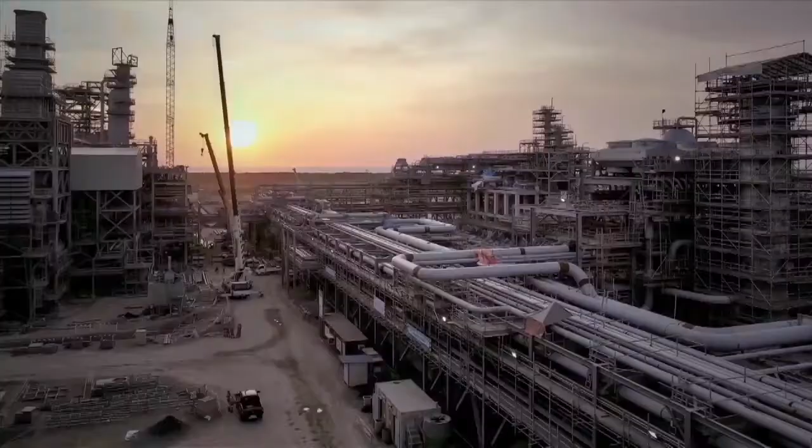A more convenient and advanced world than you can dream. A much more satisfactory solution than customers want. A company that always takes the road of success with customers. We are Haegang Alloy Company Limited.

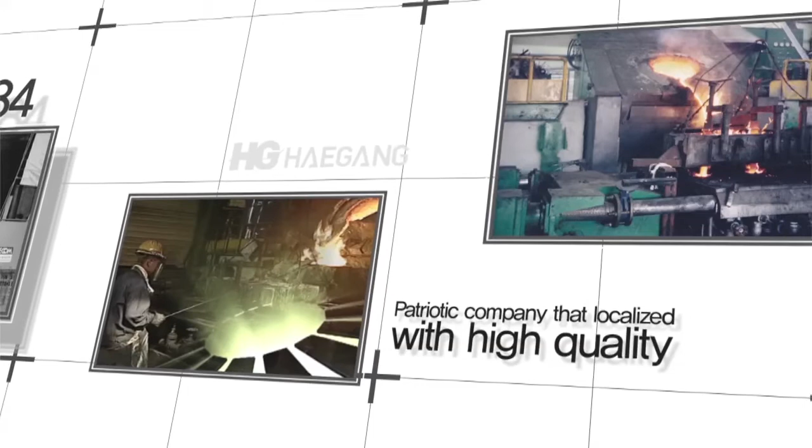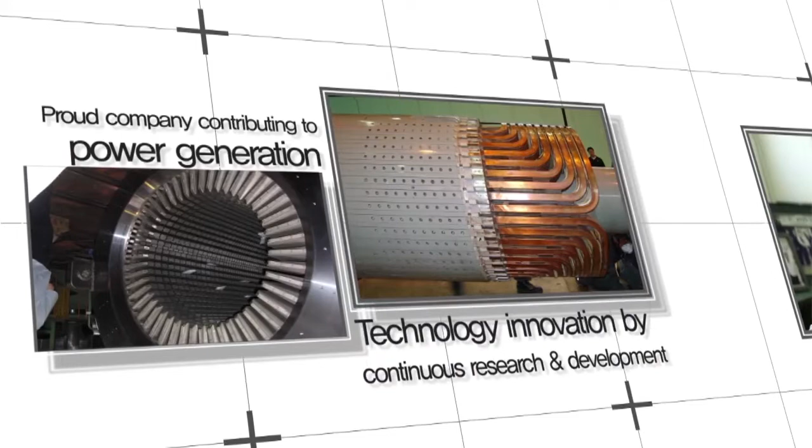Since its establishment in July 1984, we have succeeded in local manufacturing of high-quality special copper alloy that is used on import products. A patriotic company exporting all over the world, receiving attention internationally as well as domestically with huge growth. A proud company that contributes to electric power development with generator core components, fulfilling technology innovation through continuous research and development. In order to lead sustainable future growth, we are a company that moves forward to the world with new ideas, positive will, and strong drive. We are Haegang Alloy.

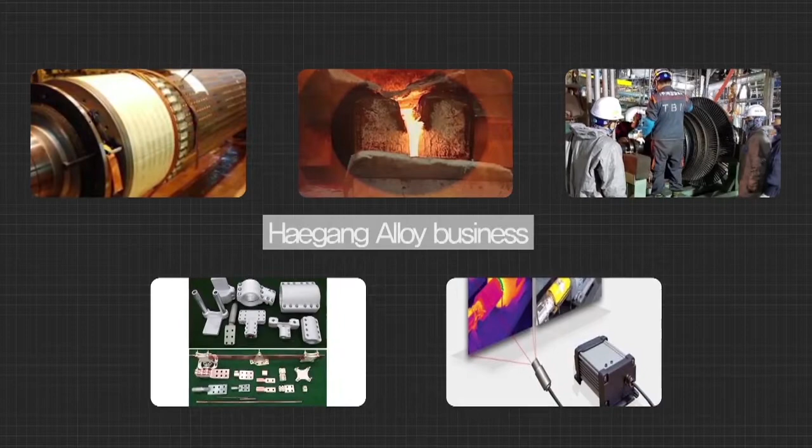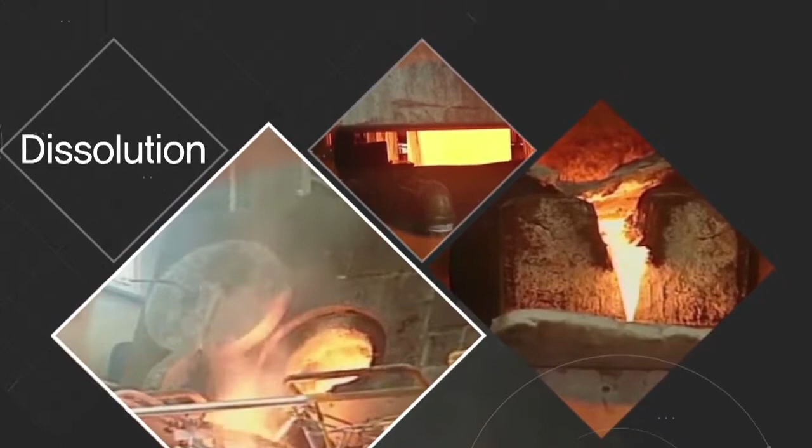Haegang Alloy has 5 key core business areas. A basic material business to produce and process copper and special copper alloy. Copper alloy material from Haegang Alloy is made by melting process, extrusion and drawing process that produce rod material, and a rolling process that produces board material. Post-processing is conducted in accordance with customer requirements using material produced by forging.

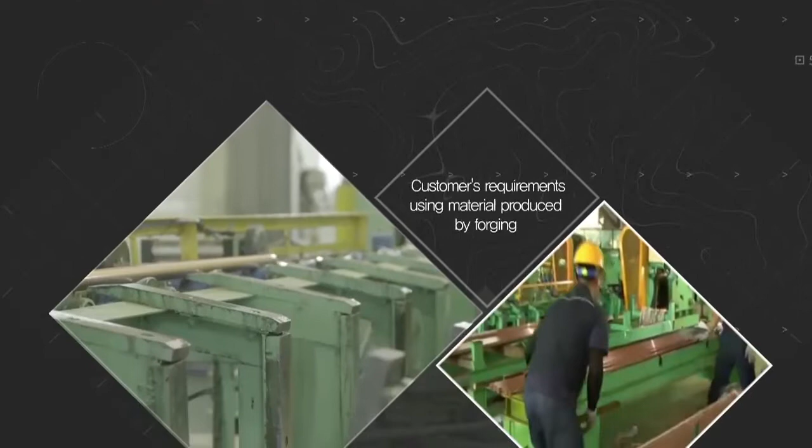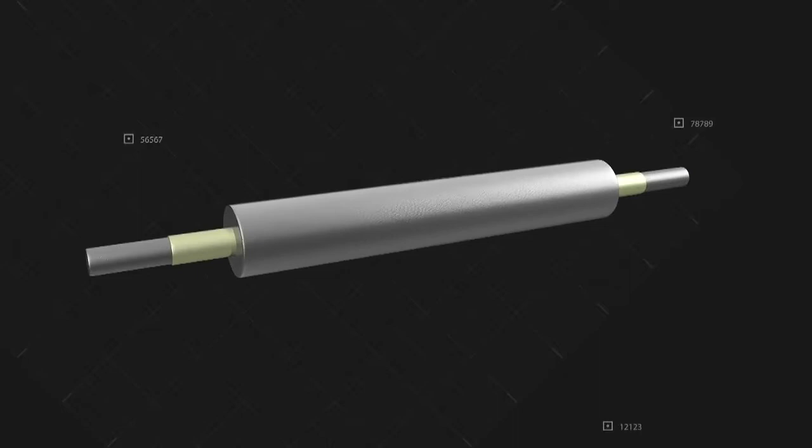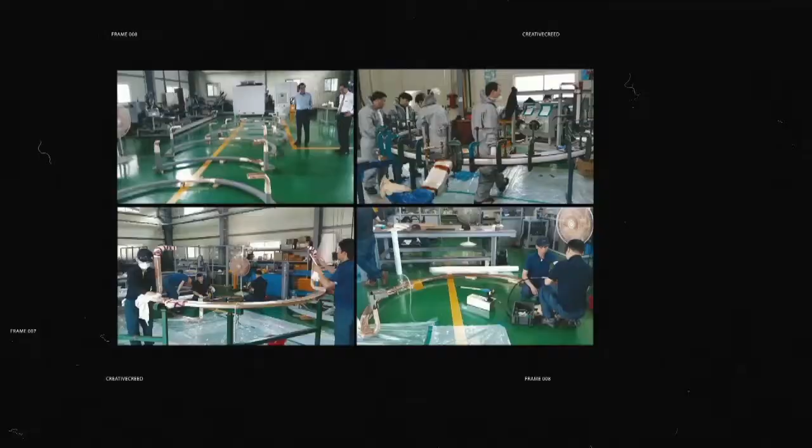A generating business that manufactures and supplies generator core components. Haegang Alloy succeeds in local manufacturing of generator stator and rotor, important core components for generators, and exports to overseas as well as local markets so that we are credited for our technology. In addition, we own top-class technology regarding special material production, bending, welding, and insulation, and we are developing fusion generator core components and accelerators which are cutting edge.

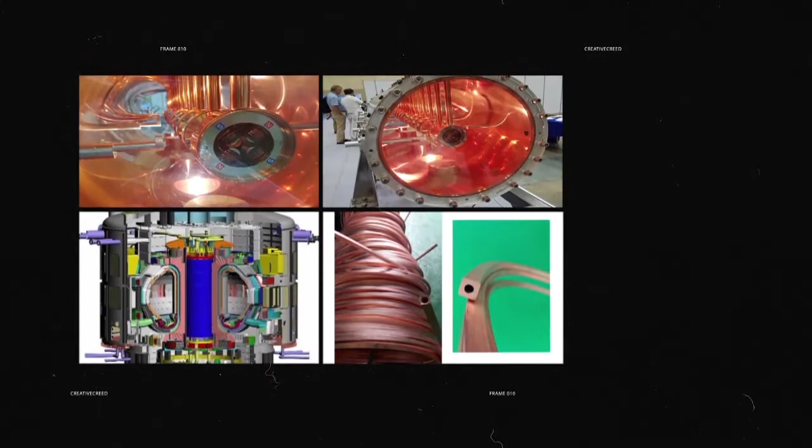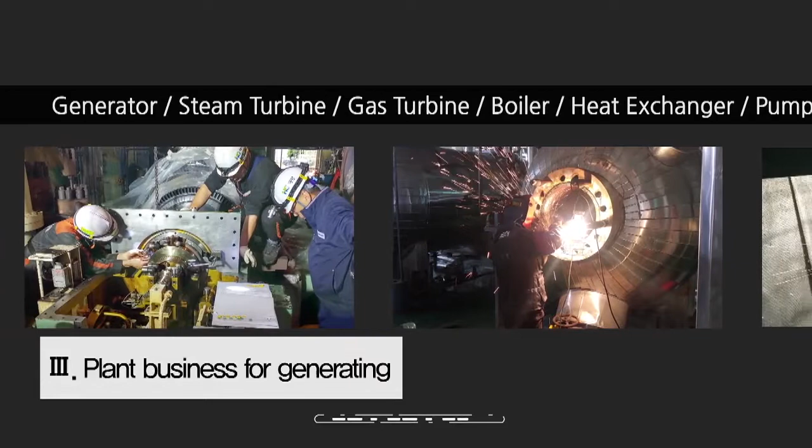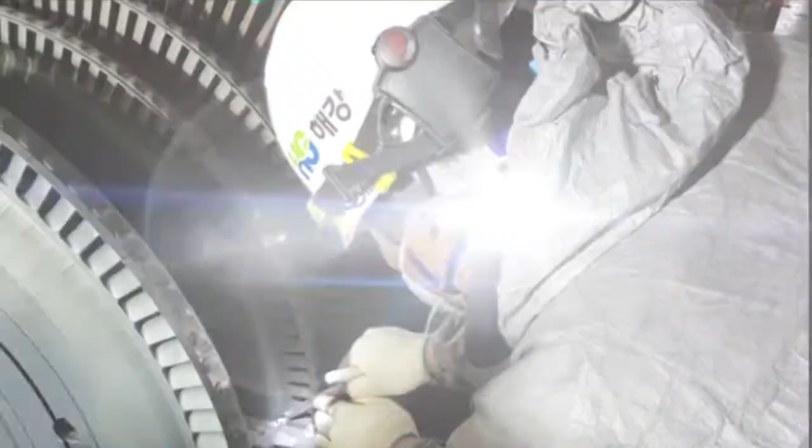Regarding plant business for generating and maintenance of industrial facilities, Haegang Alloy has experience and technology for generators, turbines, boilers, and generating facilities. There is also a power transmission and distribution components business that produces and sells materials for public enterprises, a parts distribution business, and an instrument and control engineering business that builds fire and steam pipe leakage detection systems with thermal image cameras.

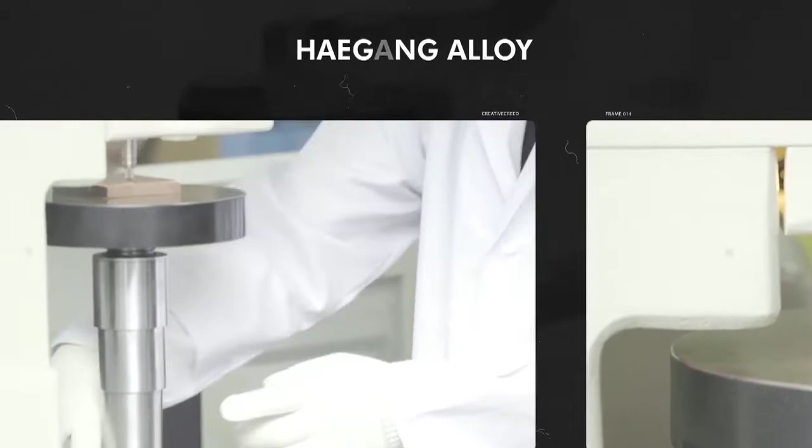Haegang Alloy has not stopped challenge and innovation for technology improvement in order to produce and develop better products. Haegang owns many patents and is registered with 6 major generating companies and KPS subcontractors of KEPCO, based on ISO quality environment certification, and has been increasing its business territory, such as executing overseas maintenance business agreements.

Haegang Alloy supplies to big companies, small and medium companies, and local 500 agents in Korea, as well as local generating companies, and supplies to 30 countries, such as the United States, Middle East, Europe, and Asia.

Haegang Alloy will stand tall in the world of generation components and total solutions based on special copper alloy material and cutting-edge technology. Haegang AP, incorporated of the world, will work hard to be with our customers and to produce a better life through new technological skills in the field of generating, special alloy, and state-of-the-art material in the 21st century.

A strong company of generating facilities that supplies power plant core components based on high-quality technology in the field of basic materials, with challenge and innovation for tomorrow. We are Haegang Alloy Company Limited.